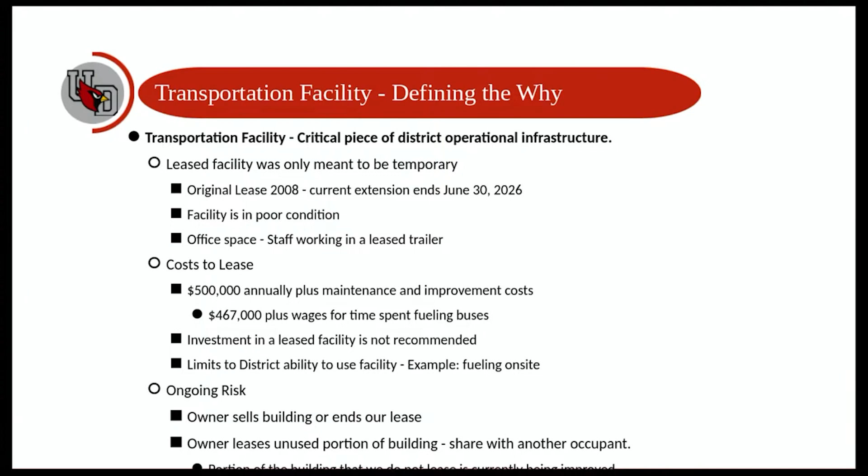So why the 309 site, quickly. I want to review why we've made the recommendation to use this site. I want to be clear, we've called it the 309 site specifically for ease of communication among the different sites that we've evaluated. This site we're talking about is between Fort Washington Elementary School and the Field of Dreams, right next to the 309 in the back there. The original plans for the Upper Dublin High School included a plan to utilize this site for the transportation facility.

We think it's important to utilize a site that the district owns, at least that's the recommendation from the administration. We have land that we own that is currently unused. It would also maximize resource utilization as we're not using it for any district operations. There obviously is the parent drop-off for Fort Washington that's being utilized back there. There are also no community groups that are using that space. Obviously, we use spaces on both sides, but that space sits currently unutilized.

And then a non-district owned site, if a good option was available, which we'll talk through a little bit tonight, would require significant one-time costs and then reduce tax revenue forever.

So this is just a brief timeline of what we've been through since October of 2020. This continued recommendation has not been made quickly or without significant research and deliberation. 3 years ago we started this, it was my first conversation here at the district for the transportation facility. But this conversation goes back to before my time, all the way back to the building of the high school. In February of 2021, the board approved the first feasibility study for the 309 site, and Dewey Engineering did that work for us and determined that site was feasible for the project that we are discussing.

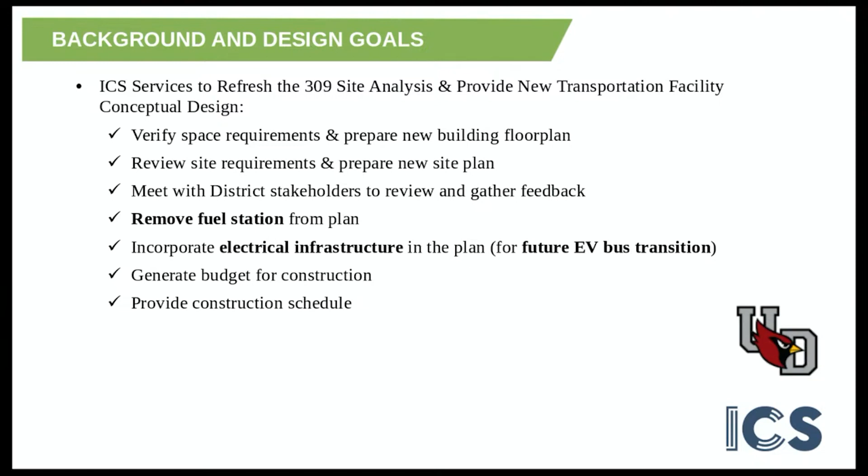So we started this with a kickoff meeting with the administration. We also performed an on-site review of the existing facility you have, to catalog all the equipment that needs to be stored on the site. We needed to determine what the storage requirements were for this new building. We created several floor plans after mapping out what that space program looked like and reviewed that with the district. We also evaluated all the existing information out there, including property and site data dating back to 2008 when the original land development process was in progress for the other construction project. We did engage an environmental specialist to update and review the wetlands on site and update the requirements for setbacks, which we've included in our site layout.

And then also we gathered parent drop-off data. Both the front and the back of Fort Washington Elementary is used. So with this being in the rear location, we wanted to get a feel for how many students are being dropped off on a daily basis by parents, so we could possibly build that into the plan. And then we created several options to review with the district, and selected all major system components to get a good cost estimate together.

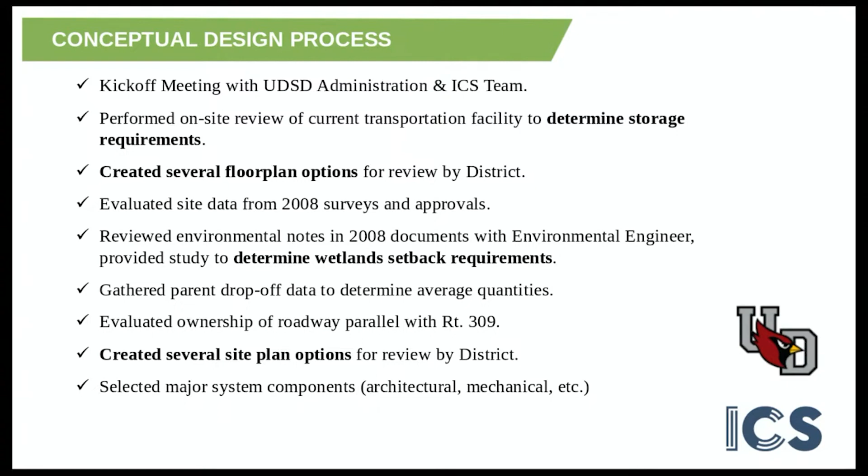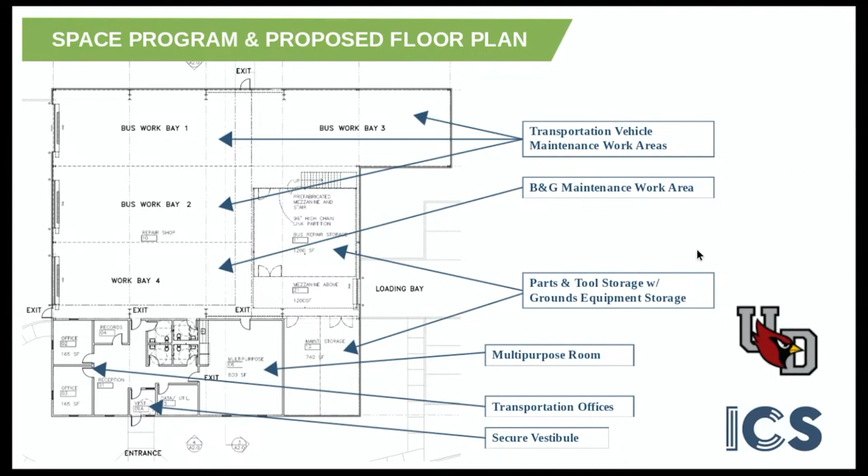At the request of the district, following storm damage in September of 2021, lots of the existing vegetation was damaged. So there was a request that we also evaluate potential areas where you would add back more landscaping. Our understanding is there's also additional funding available from the insurance claim that's unused at this point, so it could be a good option to do this.

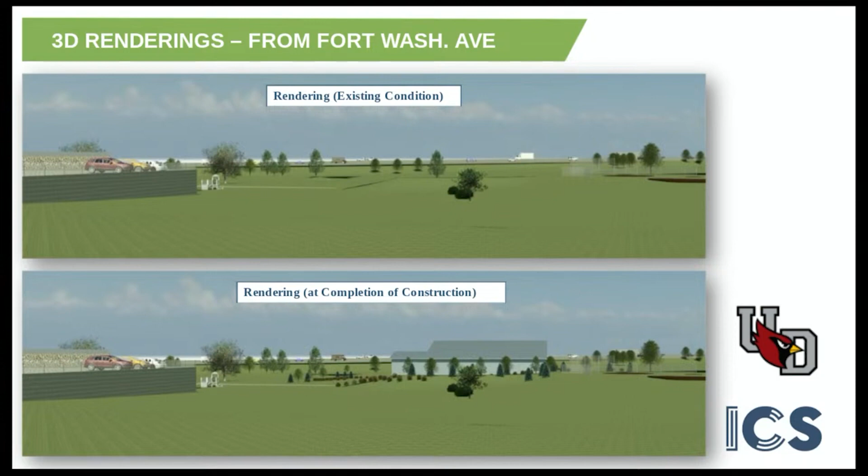And then flip it back to Andy to talk financing. Yep, I'll pick up here and just give an overview of how I see the financing for this project working, should we move forward with it. So as Mr. Guider mentioned, we're looking at approximately a $10.3 million budget for this project.

It was noted previously, but it's worth noting again that that $10.3 million does not include financing costs, builder's risk insurance, and permit and inspection costs. There are a couple dollars associated with each of those, but we don't have those numbers in front of us right now. So just want to make sure we cover that.

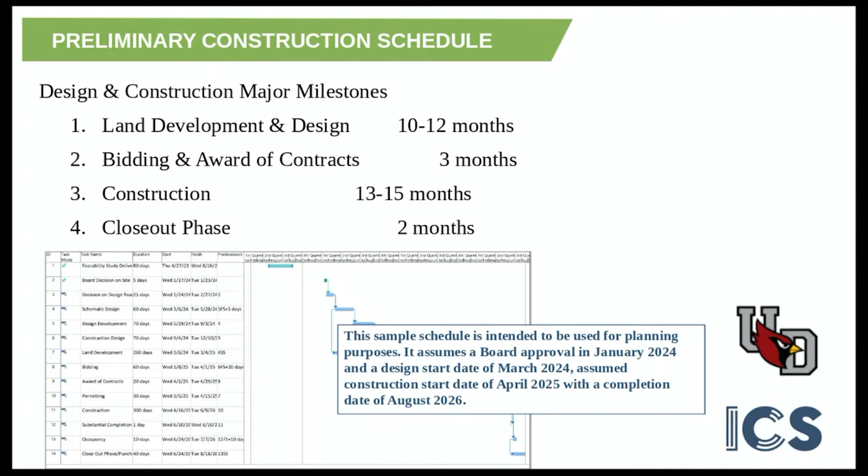So what are the next steps? If you choose to approve the design and land development process, we will get going with that. We'll start schematic design, update the site surveys, and determine the necessary relief variances—there are some mentioned in the report that we have to obtain from the township, I believe 2 and 1 approval. We then go from schematic design to design development and land development, doing that in concert with the district, with Mr. Robbins, Mr. Lester, Mr. Leckman, and the team. As we go through, we tweak things, move stuff around, and make sure what we're presenting is totally beneficial to the district. Then we solicit bids from contractors, and once we receive the bids, the board makes the final decision to move forward or not. Construction begins shortly after that. So that is the process and next steps from here on out.

So at this point, are there any questions from the board?

All right, thanks to all 3 of you for the presentation. Let me open it up to the committee for questions or comments. Anybody? I do have questions on that committee. You want committee to go first? Go ahead, Jeff. I should mention—I forgot to mention up front—but Jeff Wallach is now a member of the committee, having been appointed to the seat at the last legislative meeting. Go ahead, Jeff.

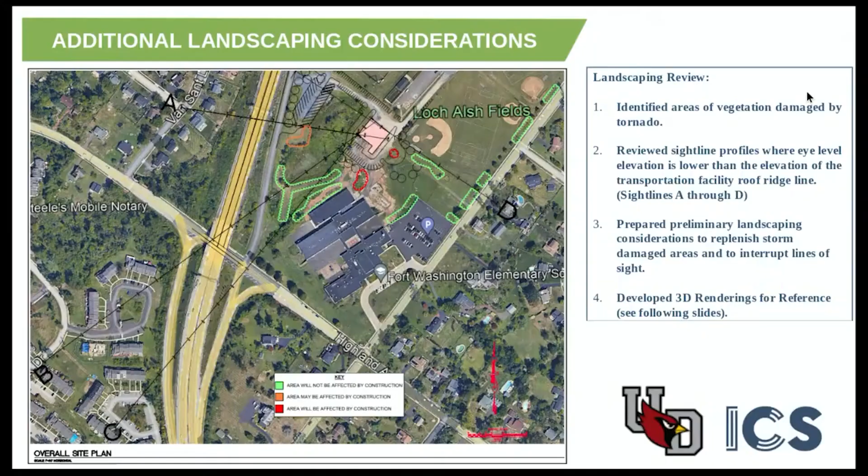All right, I think that's it for my questions. Thank you. All right, Stu.

Thank you for all the information. Two questions. First, this is more just confirming understanding. I know, and I am a recent Fort Washington parent, I know we're talking about traffic patterns with pickup at the end of the day at that circle. Based upon what we know about the transportation schedule, this is a question, but I assume there would be minimal impact to pick up and drop off because of the times that buses are out.

I know you said you have to do a traffic study as one of the next steps, but presumably you've already done some analysis. There was a previous traffic study done as part of the previous analysis, but in talking with Chris, the coincident times would be different, right? The buses are leaving earlier in the morning than the parents are coming in, and vice versa in the afternoon.

All of the parents will be picking up while our buses are out doing the run, so you won't have any cross traffic there. Okay.

And the second question, during construction, what would the impact be, if any? Presumably parents would no longer be entering from Highland, they'd be coming down from Loch Alsh, correct? What disruptions would occur during construction? We would have to reroute the drop-off temporarily because we're going to need to build all those roadways in there. There's already stone there, but there's elevation issues we have to deal with. The parent drop-off actually has to be created there.

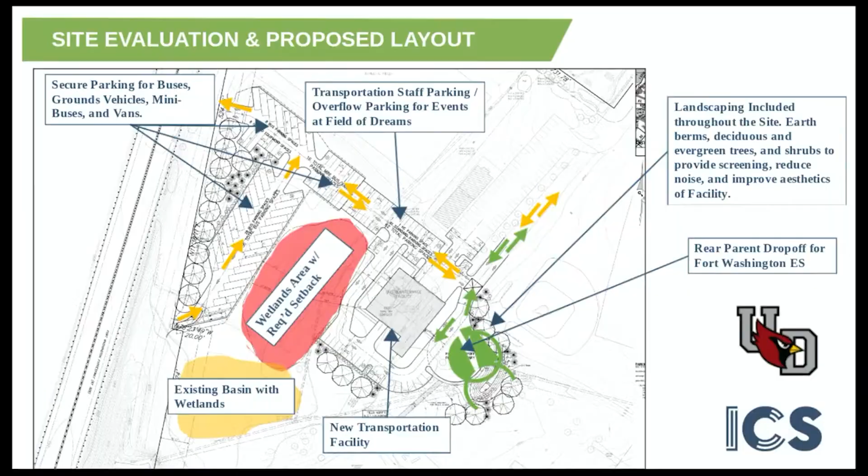And regarding the parent drop-off, Jen, your question about potentially adding a shelter—I would certainly encourage us to at least get a cost on that. I think you were envisioning, Tim, a breezeway, a covered walkway all the way to the building. I don't know that we have to go that far. We could have multiple options, just sort of a bus shelter near the drop-off so there's a place to huddle if it's pouring—might be sufficient. We can talk about those options when we see them. Am I right that's what you were envisioning, though? Yeah, there's definitely multiple options. If you needed a covered canopy for the whole length, it could get costly for sure.

Yeah. So yeah, I'm in favor of moving forward. Are there any other comments or questions? Do we have one from online?

Thank you. I do have another question, just thinking out 10, 20 years of usage. I know we're building in the EV infrastructure, but I'm curious, once we decide to do that, what would be the approximate cost to make it EV ready? Also, when we think about the parking spots compared to the buses, is there room for us to grow or take on additional buses if we need to? I'm trying to think about how we grow with the space as a community long term.

Yeah, I don't know if Andy wants to speak to the cost of the buses themselves, but we did get some budgets for the dispensers that could get added on. I think that's what you're referring to, right? The actual chargers, because we've built into the budget at this point just the infrastructure. Are included in. So when you say infrastructure, does that mean the chargers, or just a space for the chargers? It means we've increased the electrical service, and included underground conduit to locations where the dispensers would be added later, at a later date.